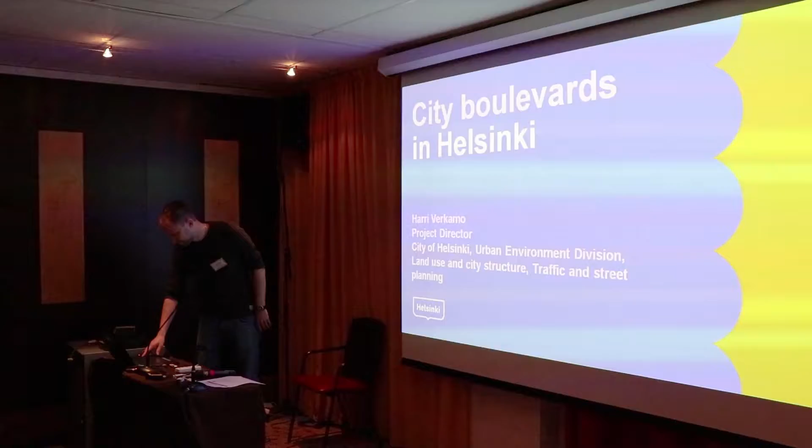The main basis of the city boulevards is the new city plan for 2050, made a couple of years ago, which is the new general land use plan in Helsinki. The plan allows the city to grow with a very high volume of inhabitants, from the current 625,000 to up to 860,000 inhabitants by the year 2050.

A third of the growth is planned to come from the gradual transformation of motorway-like entry routes, so-called city boulevards. Four of these proposed boulevards have been stated illegal at this point by the court, but the city has complained about this, and the legal process is ongoing right now, which of course affects the planning of the boulevards.

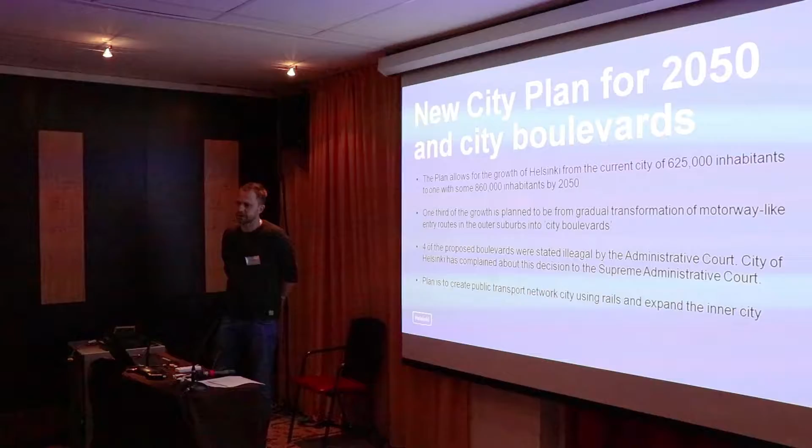The main plan of the new general plan is to create a big public transportation system which relies on light rail and heavy rail connections.

Public transport is the one thing that has been very important to the city of Helsinki, and we have made lots of work to improve it. Just last year we opened the metro expansion, the first stage of it, and the second stage of the expansion is under construction and will be open maybe in 5 or 6 years.

Also in the region there has been built a train loop to the airport, and there's another train loop under planning that goes under the inner city.

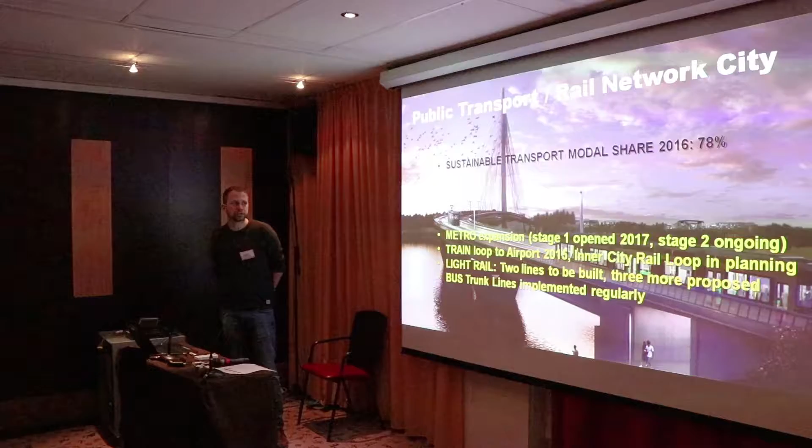Light rail is one big part of the new city plan, and we have one line that is going to be built very soon. In a couple of years the building will start, and it's one east to west connection in the city. We've also made lots of work with the bus trunk lines, so faster bus connections in the city. The sustainable transport modal share is now 78%, which is quite high, I would say, in the city.

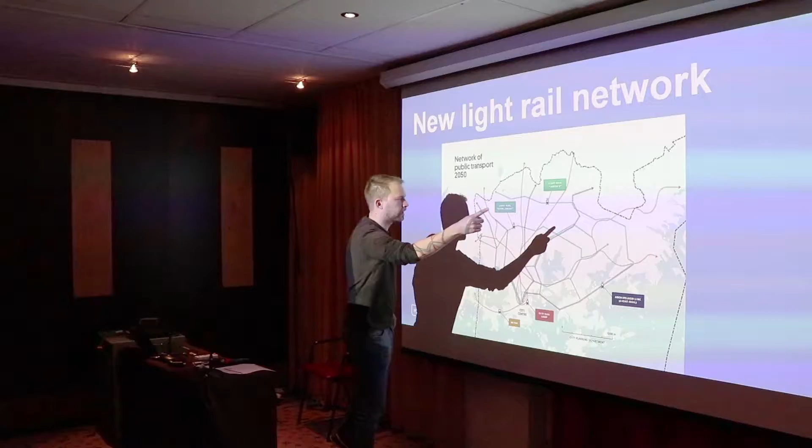But the one we are missing now is the light rail system, and this is the next stage to be built. The first light rail line is going to be this so-called Jokeri line that goes from the east part of the city to the west and to Espoo, and will continue in the Espoo side also. So it will be a good changing connection also to these entry railway connections.

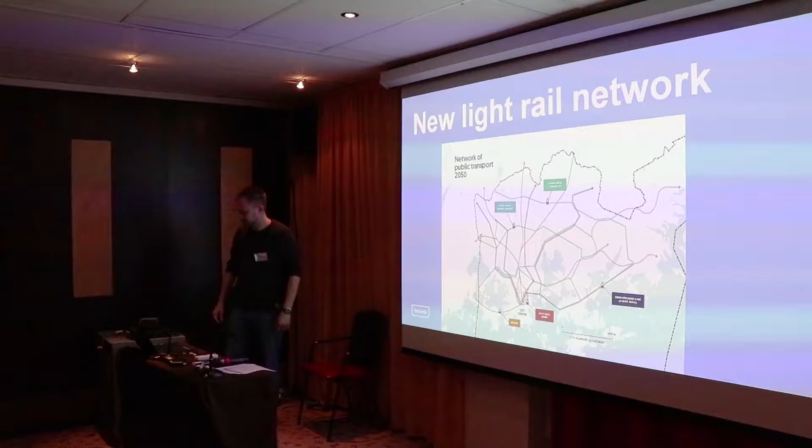But this is very important if we are planning to build some city boulevards, that we improve this light rail network at the same time.

That's why we need the city boulevards to grow the inner city outside. These areas used to be some harbor areas, but in the early 2000s the harbor moved to the east part of Helsinki. So these became vacant for another use, and are now being built as mostly apartments and some businesses also.

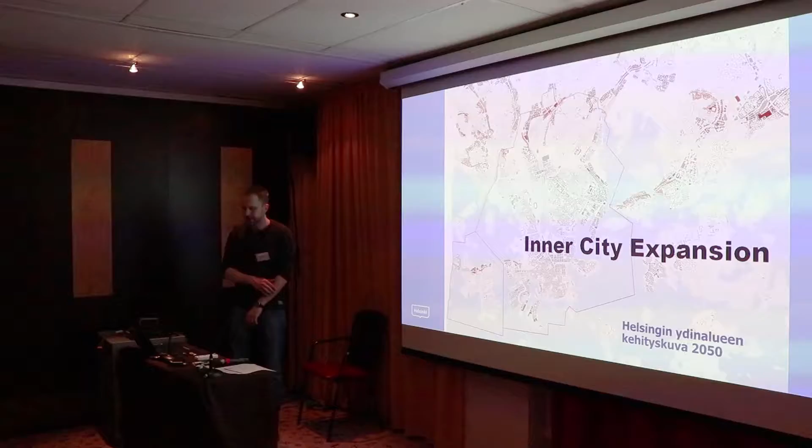Pasila area, which I'm working in, is right here. Here's shown the new inner city expansion areas that will be the next stage of the inner city, to build more inner city, and these are all based on the city boulevards, these areas. So to expand the heavily built inner city is the main focus.

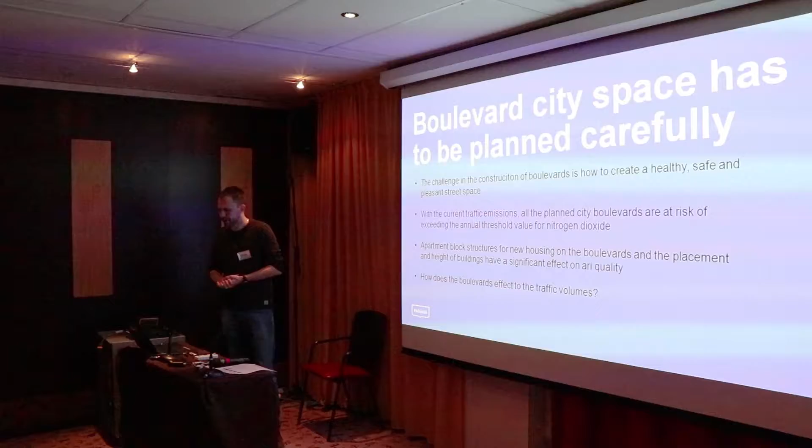But planning the boulevards, there are some very great challenges also, which has to be concerned. One is how to create a healthy, safe and pleasant street space, because all the boulevards will be in high traffic volume streets. So these are very difficult things that will create lots of challenge in the planning.

And what are we going to do with the emissions? With the current emissions, they will be exceeding the annual threshold of, for example, for nitrogen dioxide. So something has to be done. You have to lower the volumes or change how the cars operate.

Also, planning the apartment blocks has a great effect on how it will be in the boulevards. There are some studies on how to construct buildings so the air will flow on the streets, and it will change - it will be better quality air.

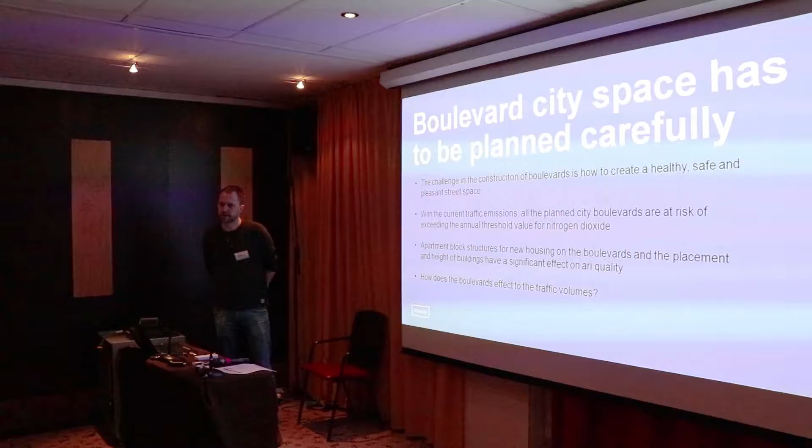One big question is how does it affect the traffic volumes, and what happens to the car traffic? So how will it proceed? We need to make lots of studies about the effects of the traffic, the traffic volumes and directions. We thought that if the traffic can't go with the boulevards as it goes now on the highway, where will it go? Will people change their behavior and use another transport, or will they use another road or smaller streets? This is something we don't want - that the traffic flows into the smaller street network. That's a great concern.

What will happen to emissions and traffic noise if we start to build lots of apartments next to the heavy traffic streets? How will the apartments be, and how will the street environment be with the great traffic and the emissions?

And how will it affect safety, especially pedestrian safety? Because now with the highways there are no pedestrians there, and if we transform them to streets, we will create some conflict points with car traffic and pedestrians. How will we plan those conflict points so they will be safe for the pedestrians?

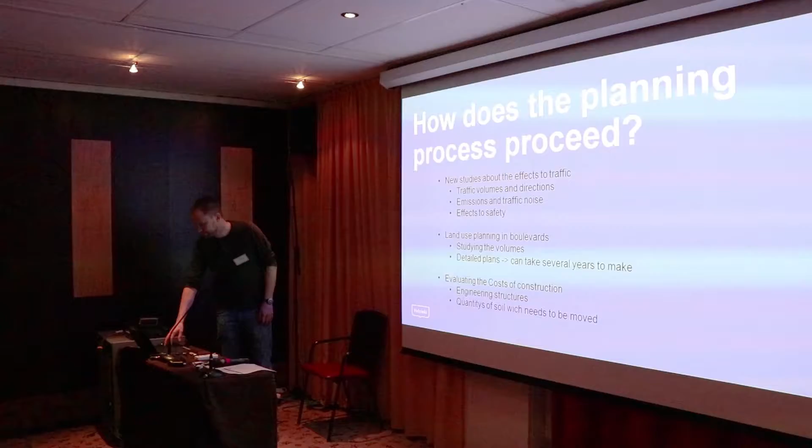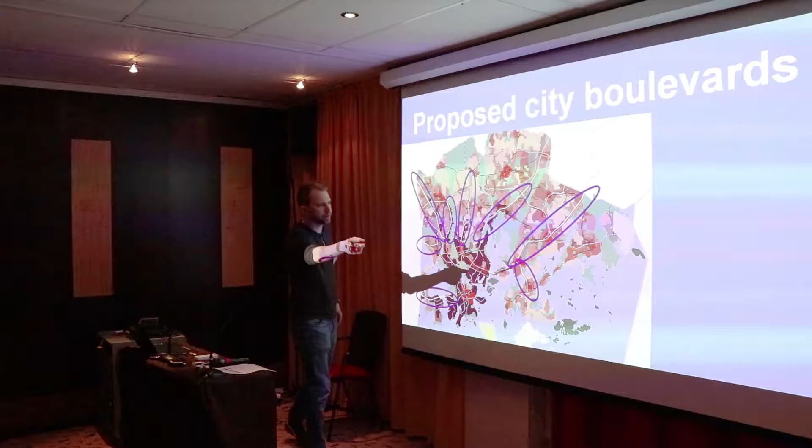So these are the proposed boulevards in the general plan. It's all the entry roads to the inner city, inside this ring road that goes around the city. So it's a very big plan, and it includes all the highways in the city.

The first city boulevards will be these three, because these are not stated illegal at the point, so it's easy to start with them. The first one is Vihdintie highway, or partly street on the south side of the highway, located northwest of the inner city. This is maybe the easiest highway to transform to a boulevard, because it already has one-level intersections with traffic lights, and it has lower volumes of car traffic, about 30,000 vehicles per day. So it's kind of already a city boulevard - it only needs the buildings on the side.

The second one is Tuusulanväylä highway, which you use if you go from the inner city to the airport. This is a highway with only multi-level intersections and traffic volumes up to 60,000 vehicles per day on a weekday. So it's much more difficult to plan, traffic-wise at least.

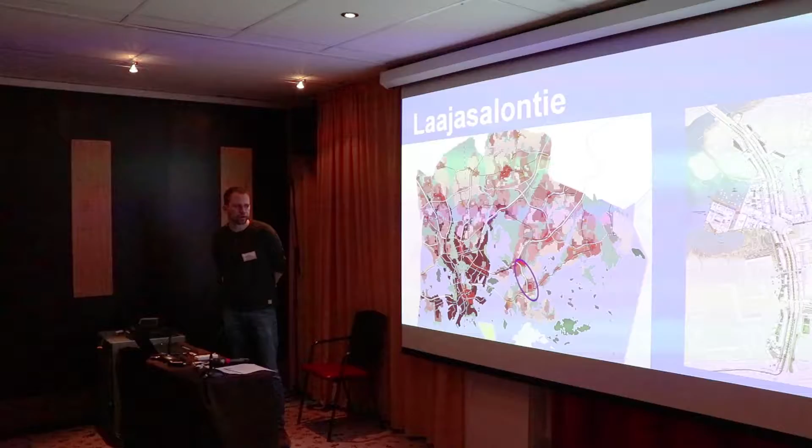And the third one is Laajasalontie street, which is an old street connecting the old oil harbor to the highway network. It's a city-owned street, and this is the one that Pirjo will present in a little bit more detail about this project.

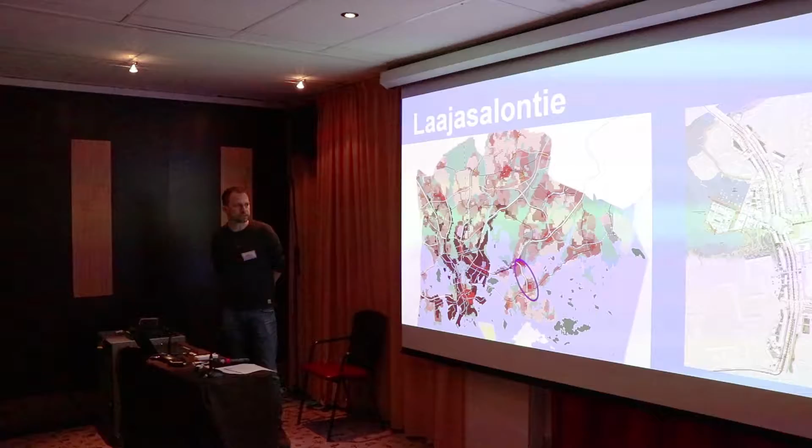And then there are the, at this point, illegal boulevards - these are all state-owned highways. At the beginning of this year, the administrative court ruled that these are against the Uusimaa regional plan. But as I said, the city of Helsinki has appealed against this verdict, and it's an ongoing legal process. We have to wait for the Supreme Court decision about this, and it will affect the planning time of these highways.

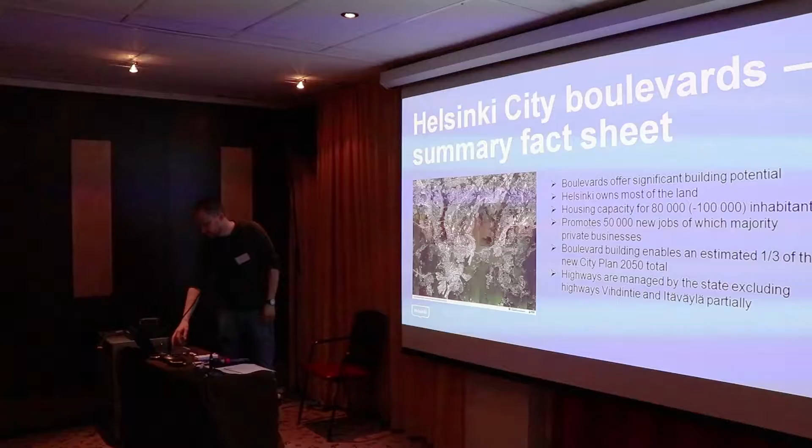Here's a little summary for the boulevards. According to the general land use plan, they have significant building potential - it's one third of all the building potential in the plan. So they're a very significant part of the city plan.

The city of Helsinki owns most of the land around the boulevards - not the exact highways, but the surrounding areas. Housing capacity is up to 100,000 inhabitants according to the plans, and also 50,000 new jobs could be created in the new boulevards.

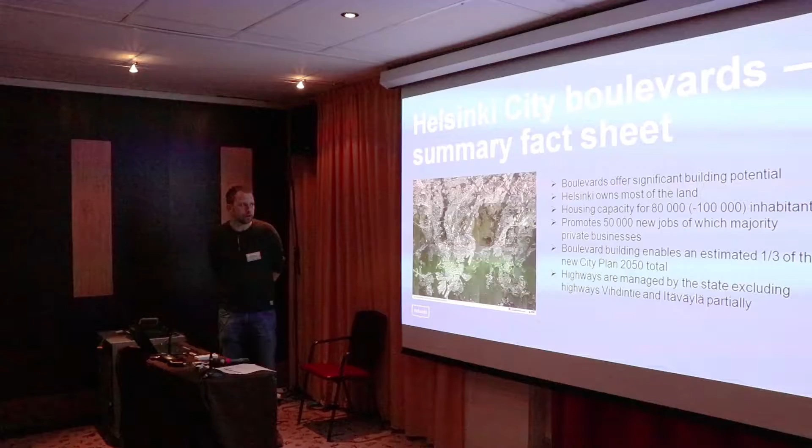Most of the planned boulevards are now highways which are state-owned, excluding the Vihdintie highway on the northwest, which from the south part is a city street, and also Itäväylä highway that goes from the east side of the city is mostly a street, and Laajasalontie is a street also.

And now I think it's Pirjo's turn to present the Laajasalontie street. Thank you, Kirsi, for the background - also from another point of view.

My name is Pirjo Siren, and I work as a project director in Helsinki City Hall, executive office. I'm in charge of two of these major urban development projects in inner city Helsinki. Today I will tell you some background of the projects, then we will have some glimpses of the urban development part, and after that a closer look at one of these first boulevardizations.

Can you hear my voice down there? Okay, good, so I don't have to try to voice control. Let's see if we get it further.

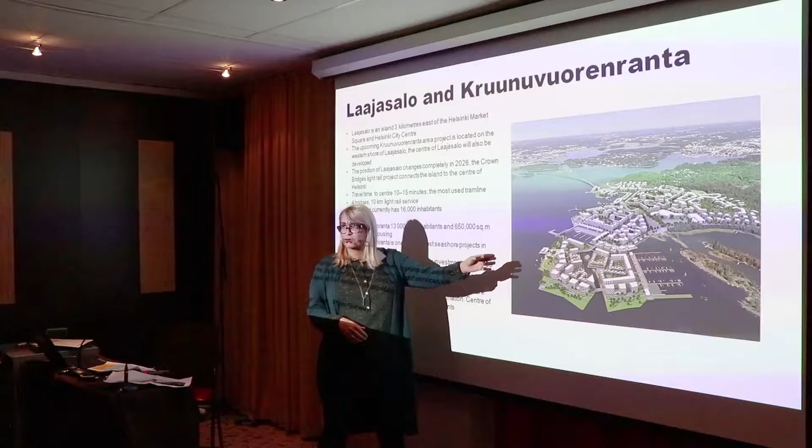Harri was mentioning that the inner city has three larger urban development projects since the oil harbors and other harbors moved to another location. On the picture, on the left side, there is the Helsinki city centrum. You can't see it, but this is Kruunuvuorenranta, located 3 kilometers from the city centrum. Next to it, a few kilometers away, is the centrum of Laajasalo Island.

The position of the island will change very dramatically in 2026. That is why the city has decided we will build quite heavily to these new areas. Kruunuvuorenranta will have about 13,000 new inhabitants and 650,000 square meters of floor area in the next 15 years. It's under construction now, and there are already 2,000 new inhabitants in the area.

The other urban development area, Laajasalo Centrum, is half the size, so there will be about 6,000 new inhabitants and about 300,000 square meters of floor area in that area. In total, the island currently has about 18,000 inhabitants, and in the future it will be a city next to the city centrum of Helsinki. So it's quite a large area.

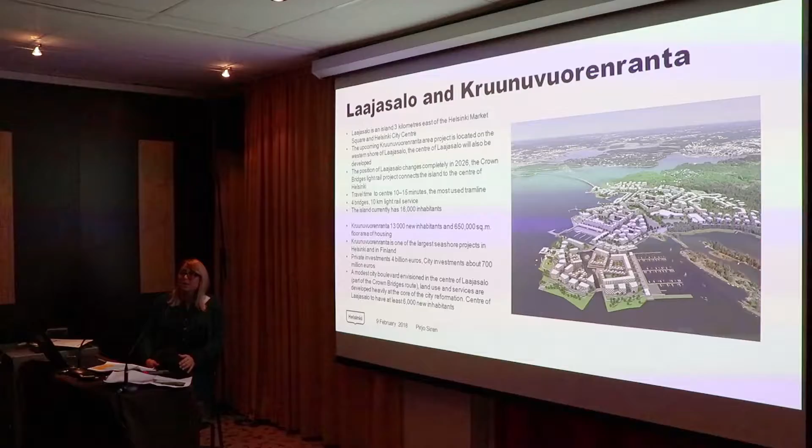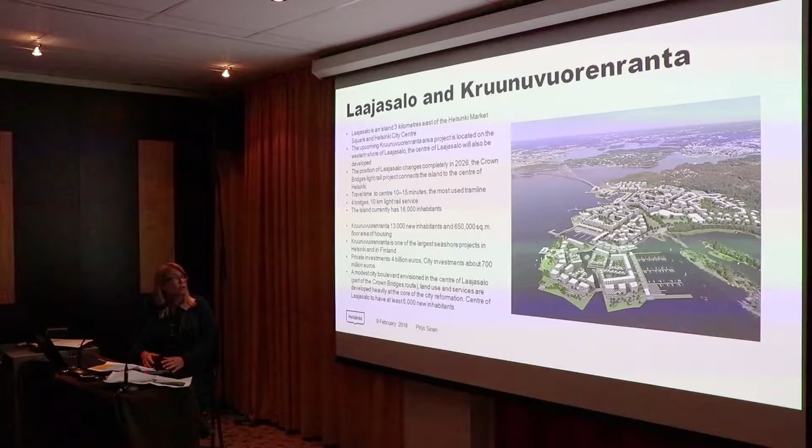When you think about the areas from an economical point of view, in Kruunuvuorenranta the private investments will be about 4 billion euros, and in Laajasalo Centrum about 2 billion euros. The city will invest about 700 million euros to these areas. So this is the background of these area projects.

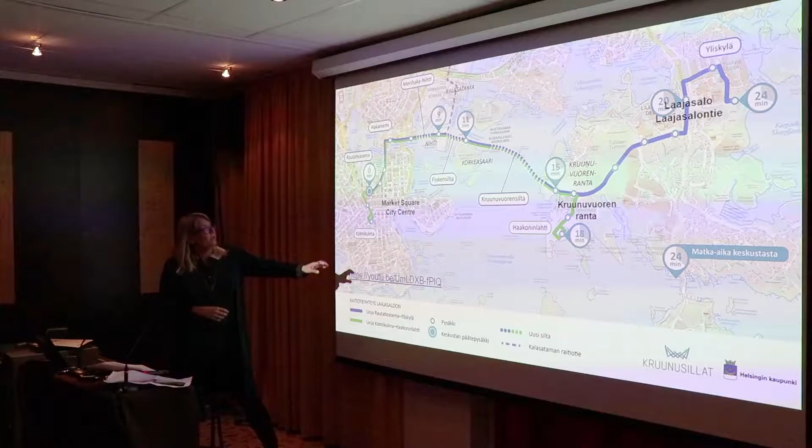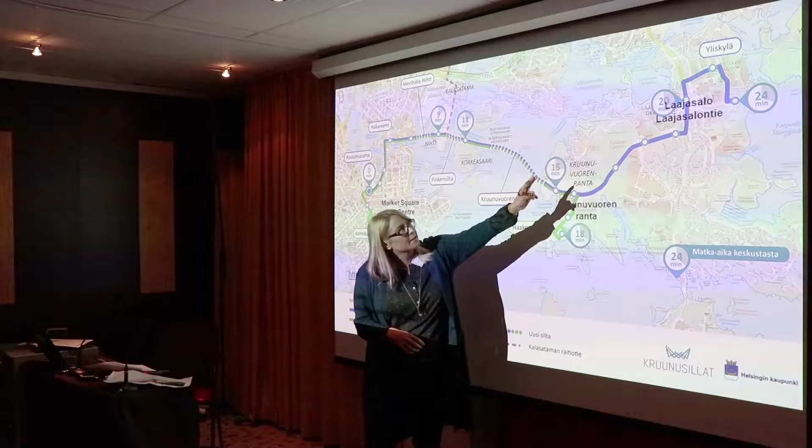I was mentioning earlier that the position of the island will change completely. Here is the city centrum, city hall and market square. Kruunuvuorenranta was over there on the earlier picture, and Laajasalo Centrum and the Laajasalontie street boulevardization are over there.

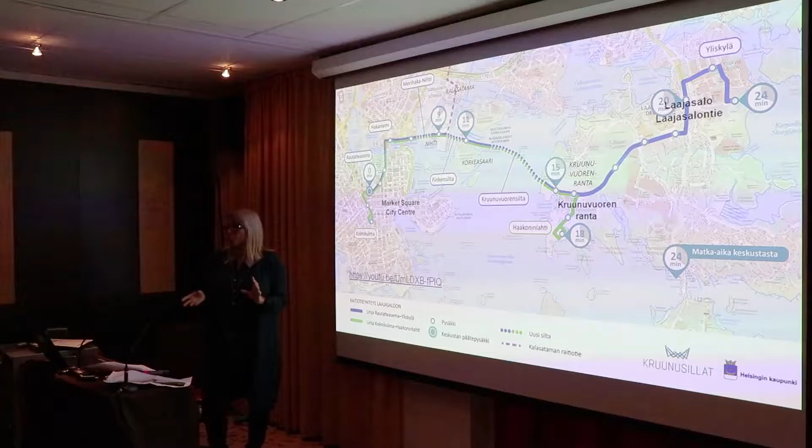The leitmotif connecting all these areas together is the Crown Bridges speed tramway project. You might have heard some words of it before, and you probably have seen at least the picture of the Finnish largest and biggest bridge. I think some of you were in Helsinki a few years ago.

We will start the building in 2020, finishing by 2026. It is very difficult to move from Laajasalo to the city centrum - nowadays it takes about 35 minutes via bus.

In the future you can get in 15 minutes to Hakaniemi and to the centrum area. The city committee made a decision 2 years ago that we have to construct and we will build this speed tramway connection. The total value of the project is about 270 million euros.

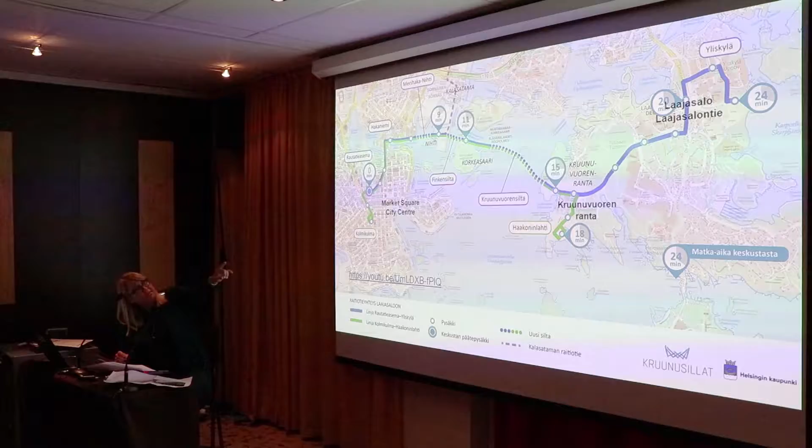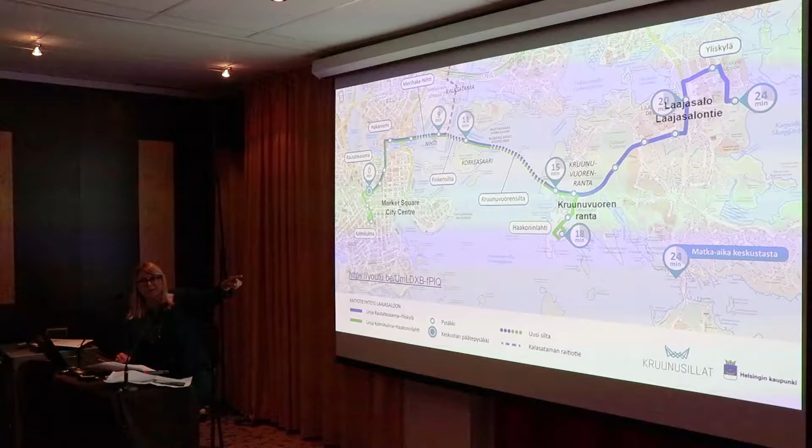It will have 2 lines. The blue line will be the main line with 45-meter speed tramways. The green line will be a shorter line from the center to Kruunuvuorenranta with new street speed trams as well, but they will be about 35 meters long.

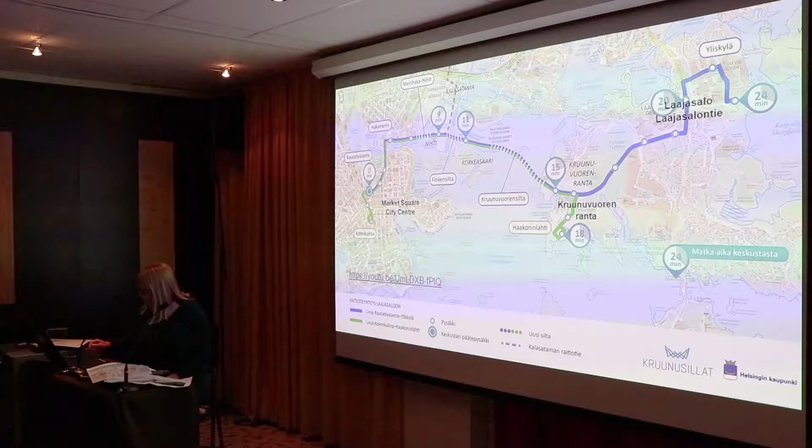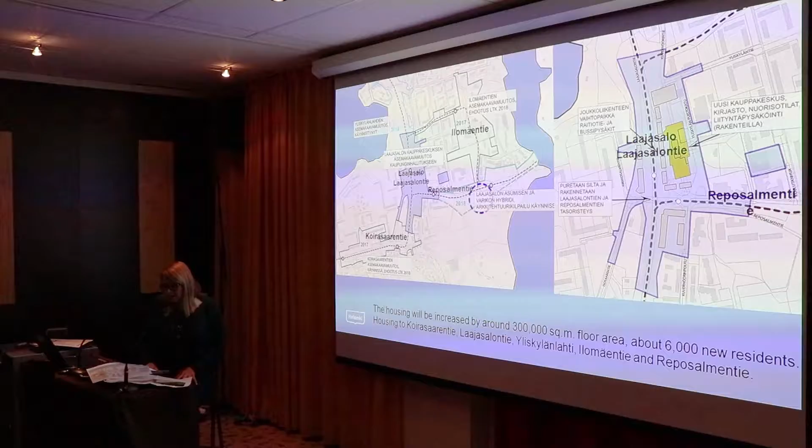So this is kind of a background for the change to the island and also a background for why we will have a boulevardization on the main road in the area. Now let's have some glimpses of the urban development part. There are 5 land use plans ongoing right now.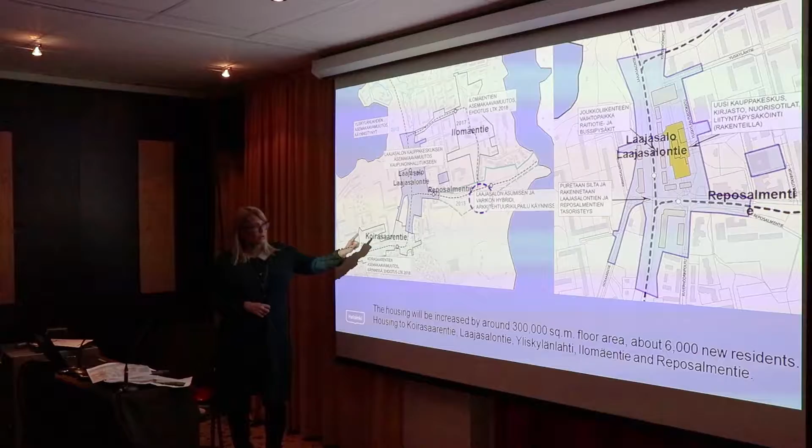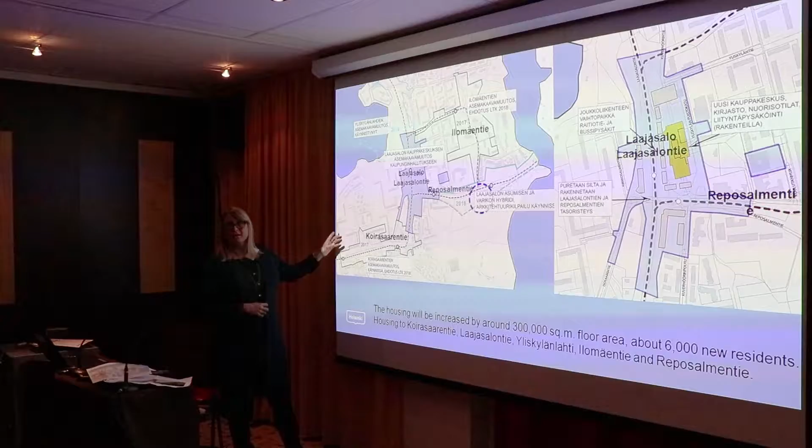The Laajasalontie boulevardization is in the middle over there. But also another main road, Koirasaarentie, is over here. It connects the centrum to Kruunuvuorenranta and to the Helsinki centrum. A lot of new floor area will be added over here too.

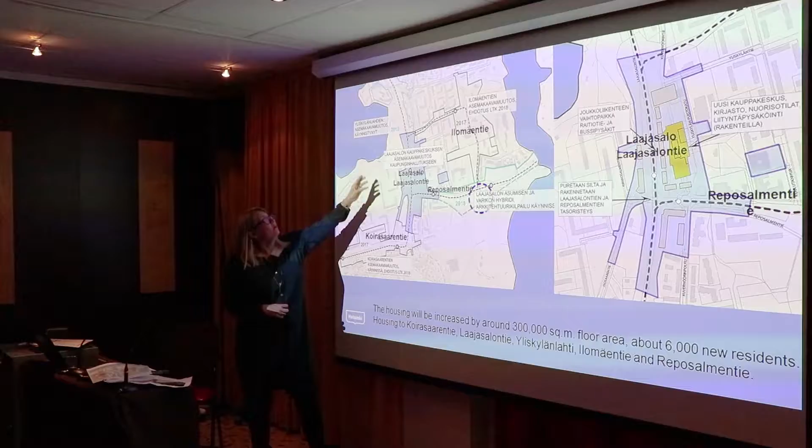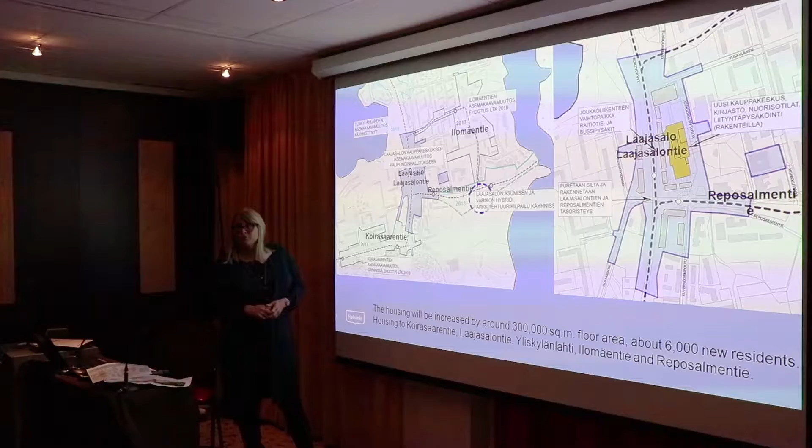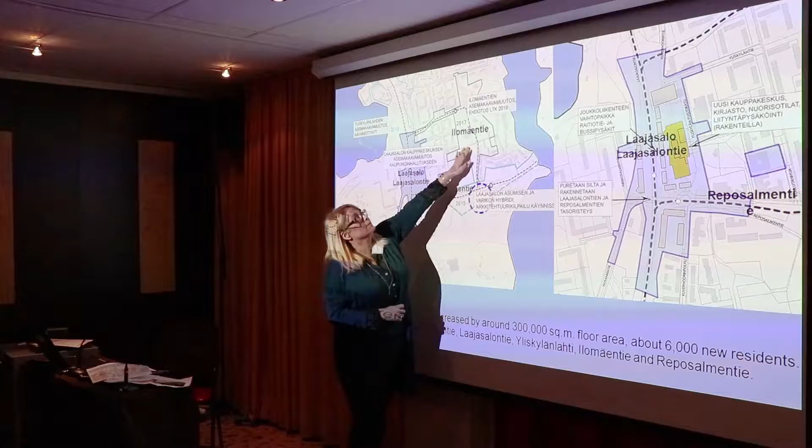Another large area, the turquoise area over there, is Yliskylänlahti, which also has a lot of floor area for housing coming next to the boulevardization. The 4th area is Ilomäentie Street, and the 5th is Reposalmentie Street.

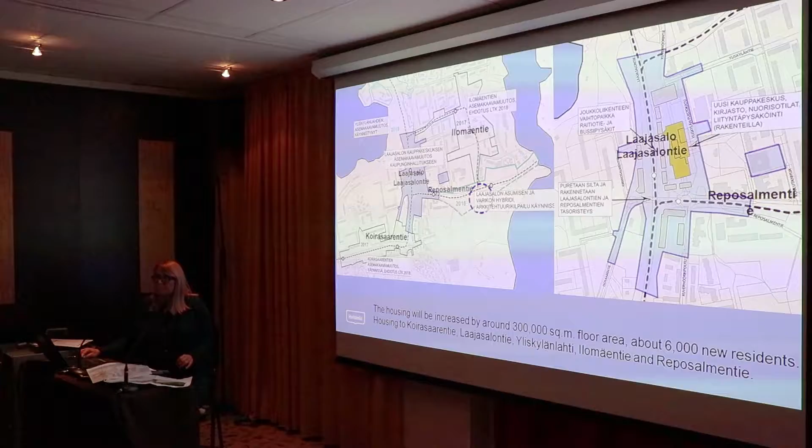In total, as I was mentioning earlier, the housing will be increased by around 300,000 square meters, and it means about 6,000 or 7,000 new inhabitants in the centrum next to the boulevardization. Some glimpses of those areas you saw.

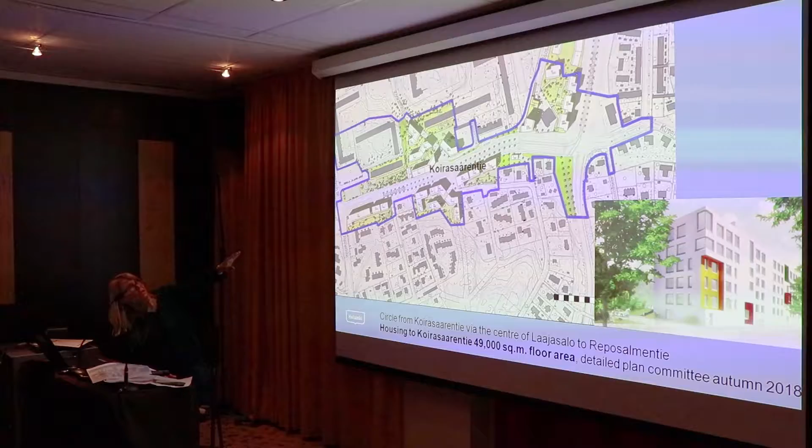This is the Koirasaarentie main road, just before the boulevardization, the southern part of it. In the yellow, you can see the new block of flats. And in the grey, you can see the old structure over there.

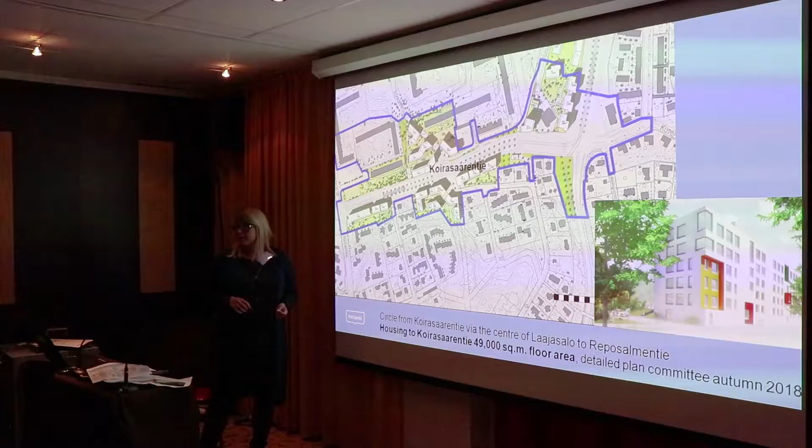The street will have new faces too. In the center, there will be a speed tramway line. Of course, there will be 2 car lanes in the future, but the traffic arrangements will change considerably over there.

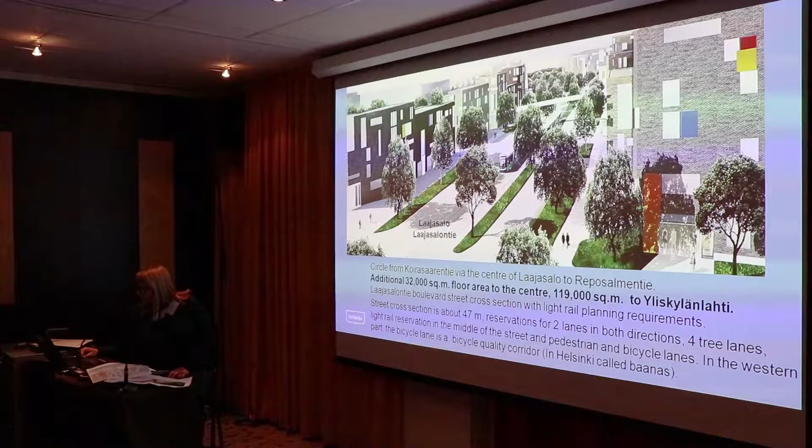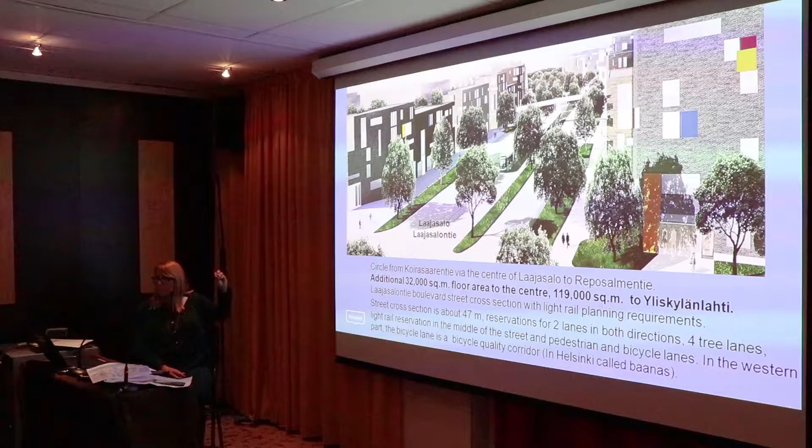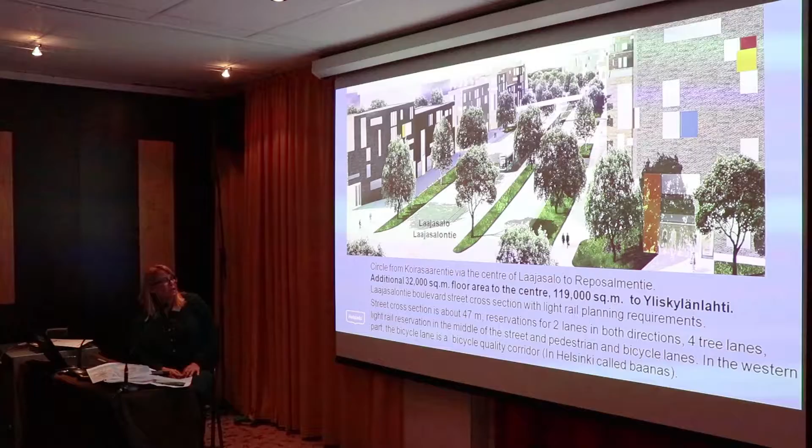And now we come to the Laajasalontie boulevardization. As Harri was mentioning earlier, it will start from the south part from Koirasaarentie and go all the way north through the Laajasalo island. There is a street cross section over there.

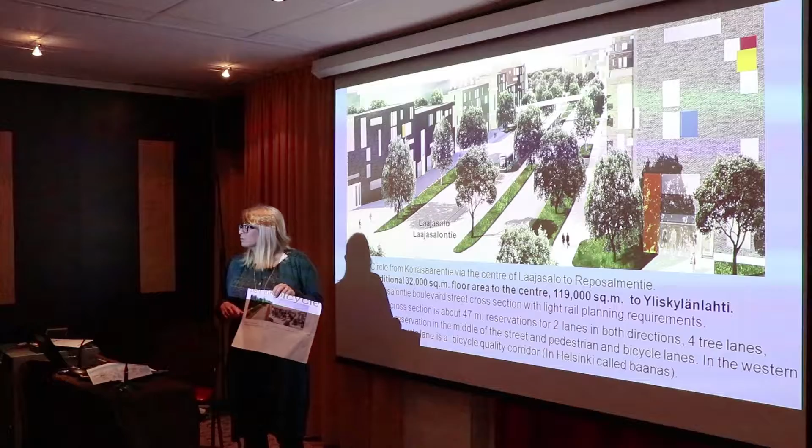You can have a look. I can give you a picture and you can have a look at it too. You can see here the old road-like situation without any housing projects. Maybe Elin can put it over.

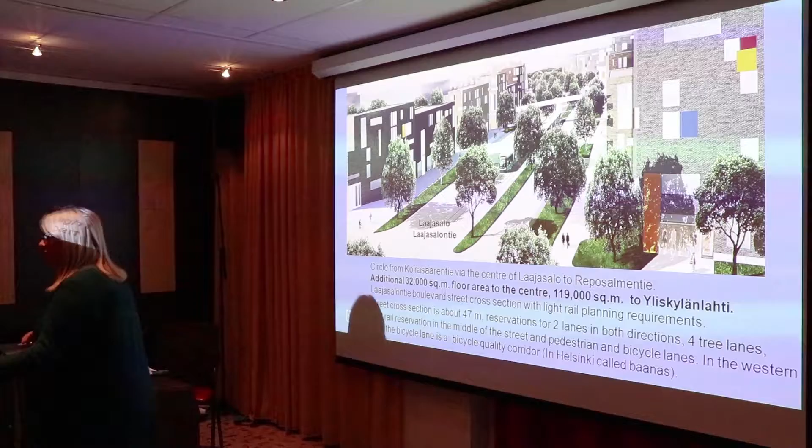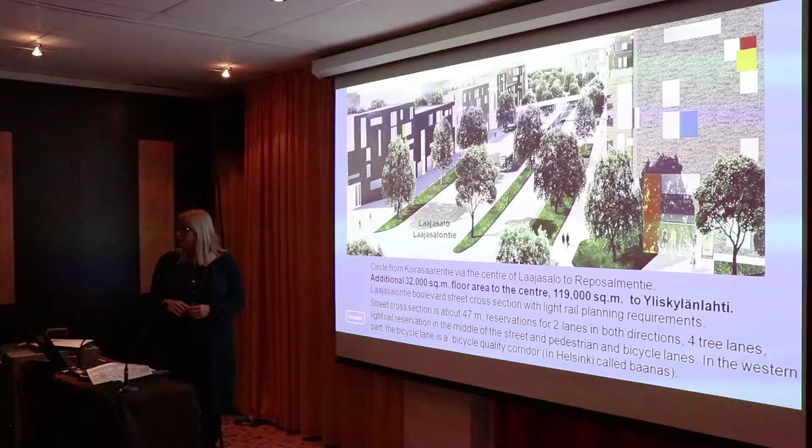There was a 60s Smith and Polvinen plan about the motorways of Helsinki, and the current situation, which you can see in the picture, is due to that old plan and one realization of it.

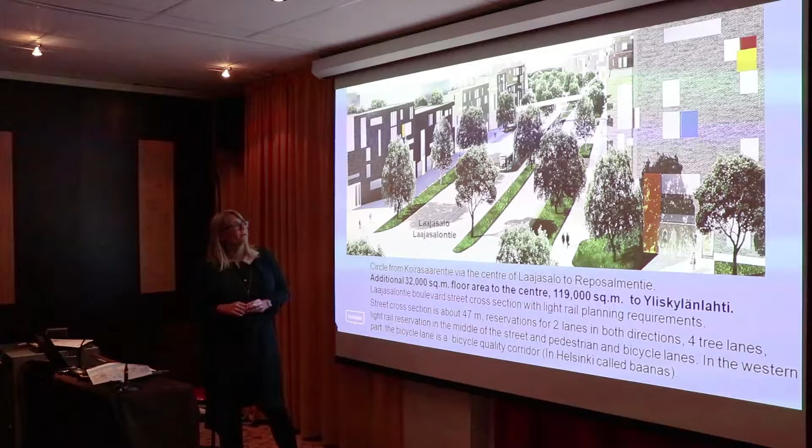The street cross-section in the boulevardization will be about 47 meters, and we will have 2 car lanes, just as today, to both sides, going north and going south to Kruunuvuorenranta and Centrum. There will be a new light rail reservation in the center over there, 4 boulevard lanes for trees, and new arrangements for bicycles and for walking.

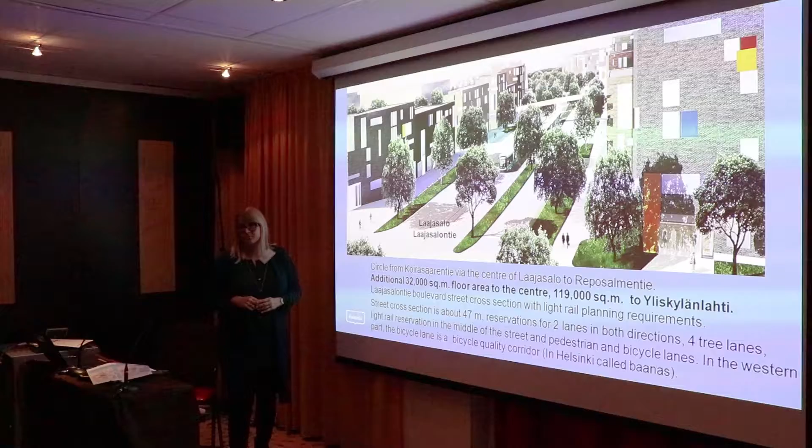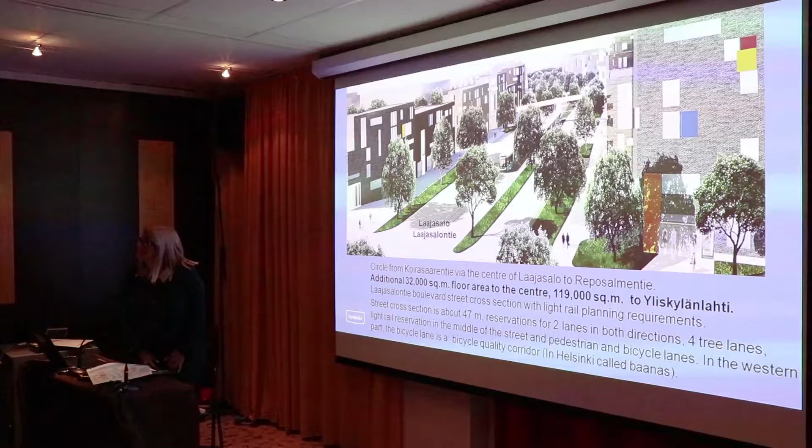Nowadays, as you can see in the picture, it's not a very good situation. The bicycle lane on the western side will be a quality corridor type of line. We call them in Helsinki 'baanas'.

Next to the boulevardization, there is an ongoing construction site already. There's a glimpse for you about the shopping center. Behind it, in the future, there will be the housing projects and the boulevardization.

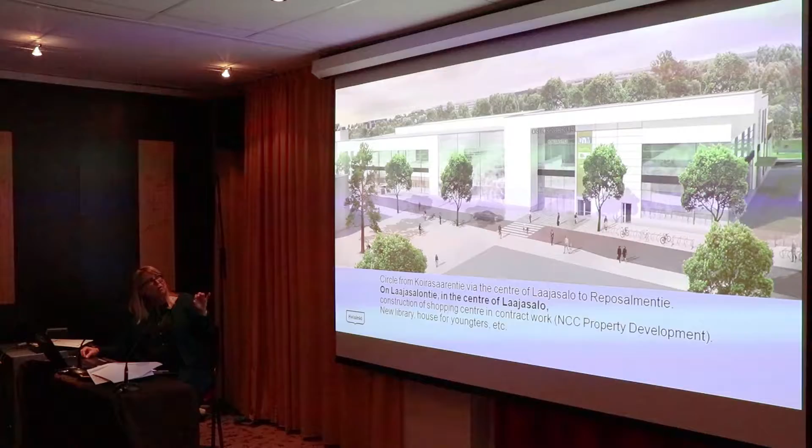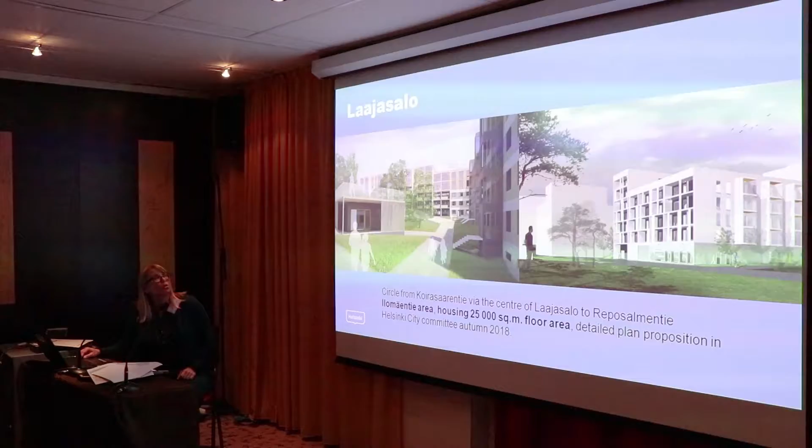It's a new hybrid kind of building. It has a new library, a house for youngsters, and other services as well. The last glimpse of the housing projects before the boulevardization is over there. In the Ilomaentie area, there will be more traditional blocks of flats coming after the construction of the street area.

So now we can have a bit more thorough look at the boulevardization.

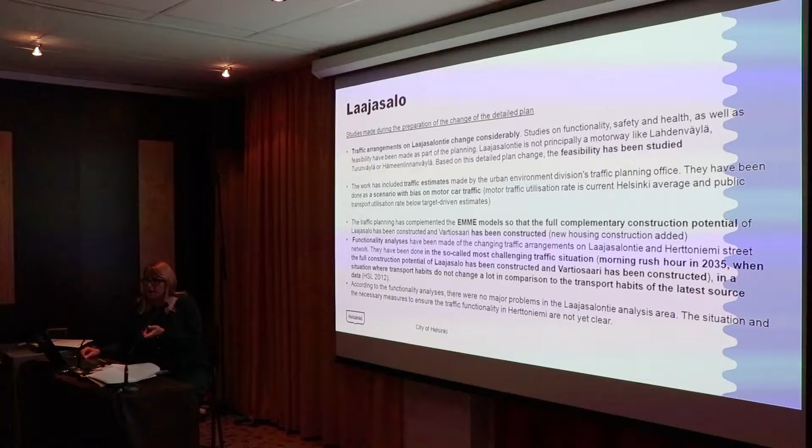Harri was mentioning the problems in general, what we will have planning the boulevardizations. In Laajasalontie the situation is really that it's not a motorway, and the state has absolutely nothing to do with it. The city owns it and the city is upkeeping it. So it's a bit different situation than the other boulevardizations.

We started the work so that we updated traffic estimates in the traffic planning office where Harri works. The basis of the work was that there was a scenario with bias on motor car traffic.

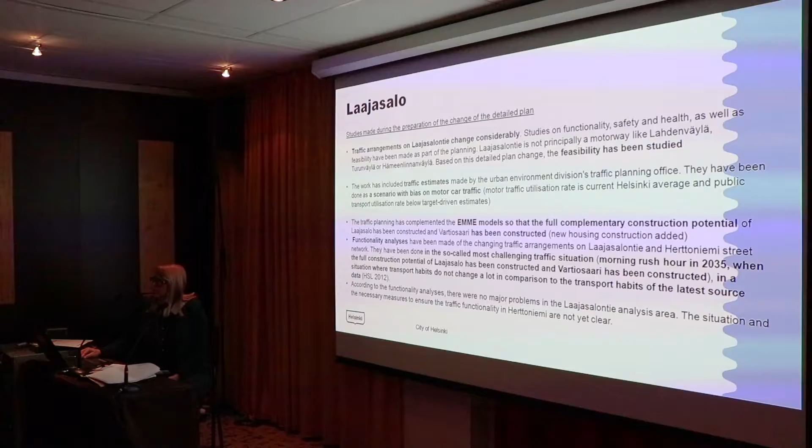Then we used EMME models, and the basis of modeling was that the whole Laajasalo has been constructed, all the housing has been done. Then we made functionality analysis, street crossing per street crossing, for the situation in year 2035 in morning rush hour, the so-called worst scenario.

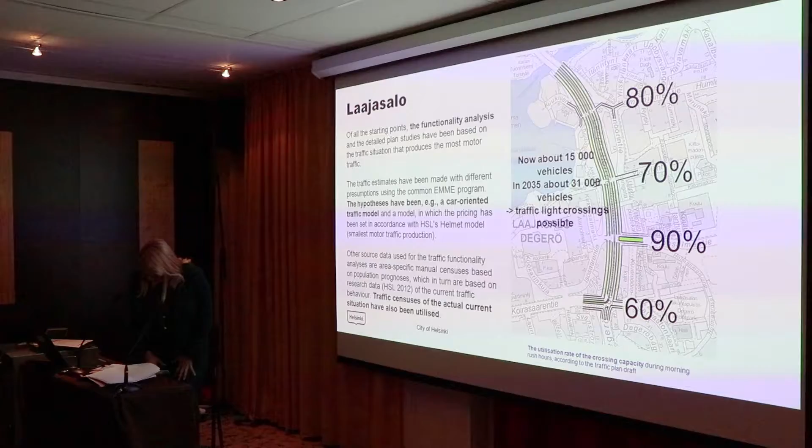It seems that in the most challenging rush hours there will be queuing, because all the cross-sections are not interchanges anymore, not in multiple levels anymore - they will be traffic light interchanges. That's why there will be some queuing, but it's not so bad, maybe two light cycles, not more. So during this modeling we learned that there will be no major problems in this boulevardization. The different thing will be at the motorways.

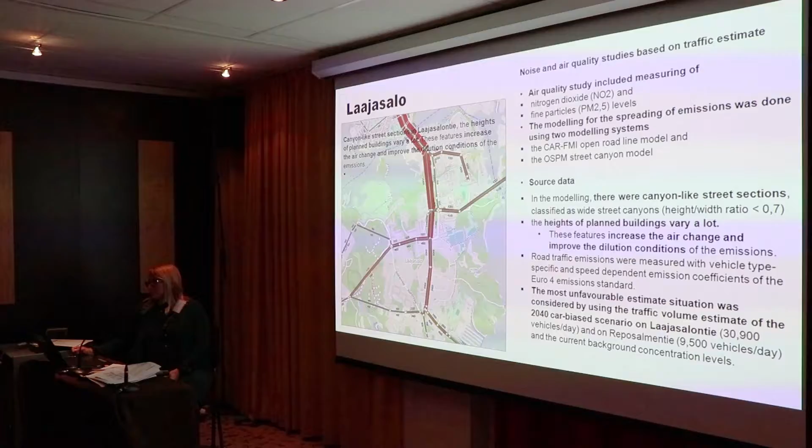Then there has been a lot of discussion in Helsinki about the noise and air quality studies. We took a closer look at the air quality by modeling it, and we used two modeling systems, which you can see on the right side: open road line model and street canyon model.

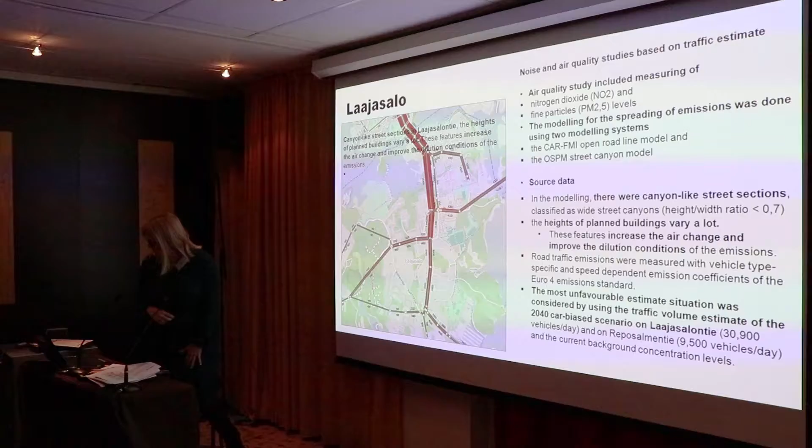What we learned is that it's a good thing in boulevardizations if the heights of the planned buildings vary. It improves the dilution conditions in the streets, so that is a good thing.

Conclusions were that the concentrations of nitrogen dioxide were under the yearly limit on all height levels. There was one checkpoint where the daily reference value was close to the reference value. When you have a look at the fine particles, it seems that the yearly average concentrations were clearly below the yearly limit.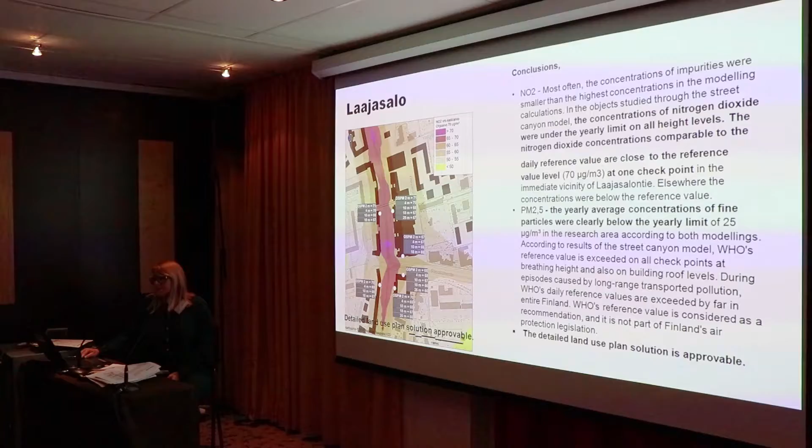And in total, in Laajasalontie boulevardization, it seems that the land use plan is approvable from this point of view.

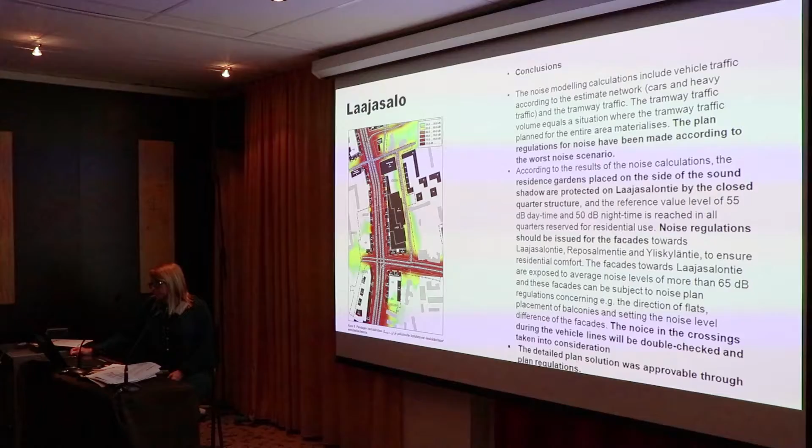Then, of course, there is the question of noise, as Harri was mentioning earlier. The city also made noise modelings, and I think there were no surprises in it - it's basic land use planning which was shown.

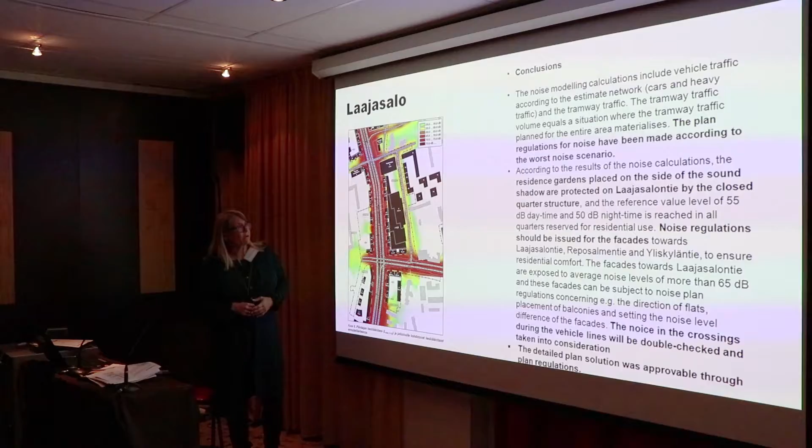The residence gardens - the black ones are the new housing plots, and this is the hybrid shopping center over there. You have inner gardens here, protected from the noise because they are on the other side from the noise. But it seems that noise regulations should be issued for the facades next to the boulevardization.

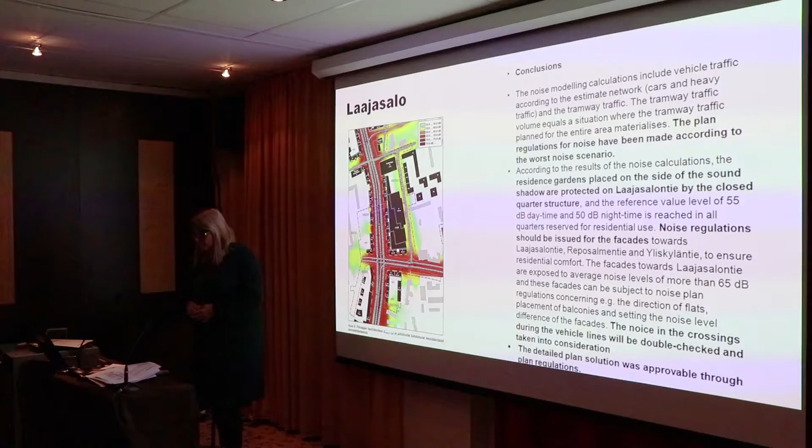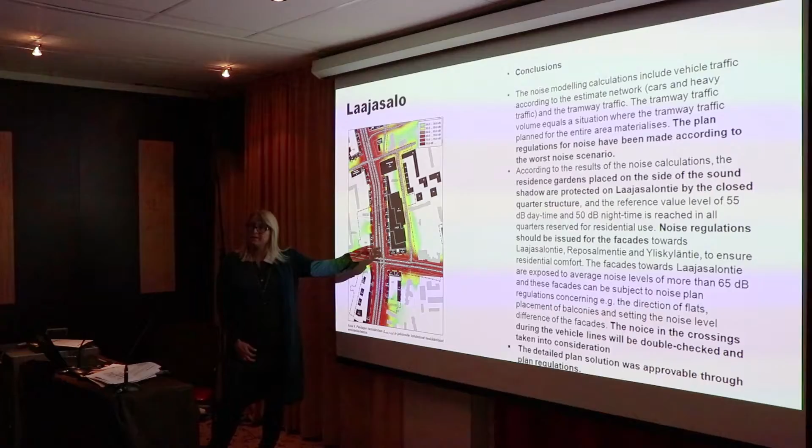We learned in one study that if you have a cross-section with traffic lights and there will be queuing, it might affect the noise too. So we decided to double check these areas and we can take it into consideration later.

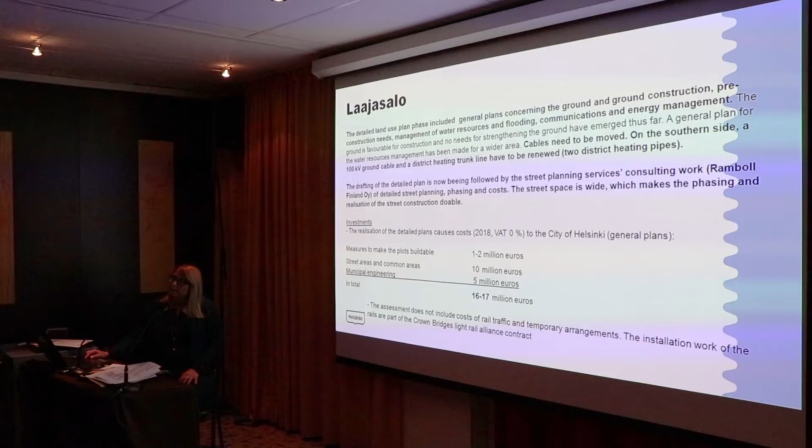Of course, when the city is planning an urban development project of this magnitude, there is a lot of general planning going on otherwise too. We had a look at ground planning, pre-construction needs of the plots, water resources, flooding conditions, communication, energy management, etc. We had a look at it in the larger area.

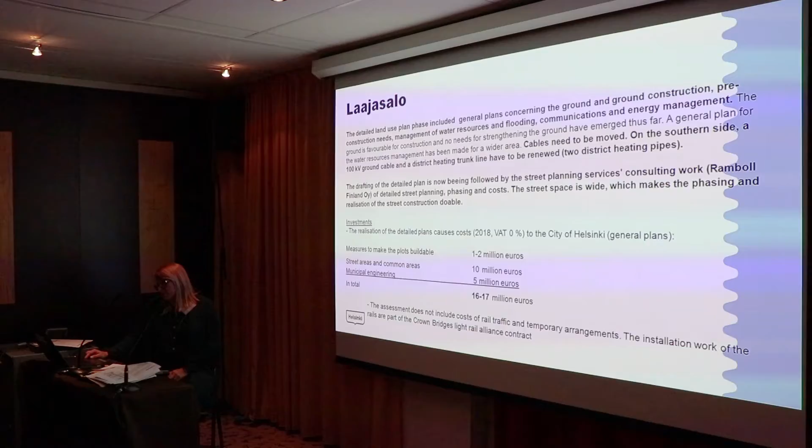It seems that some cables need to be renewed and changed, even a bigger ground cable and district heating trunk line. Also a 3 million euro water pumping station must be relocated. But otherwise there were not so many surprises or shocks.

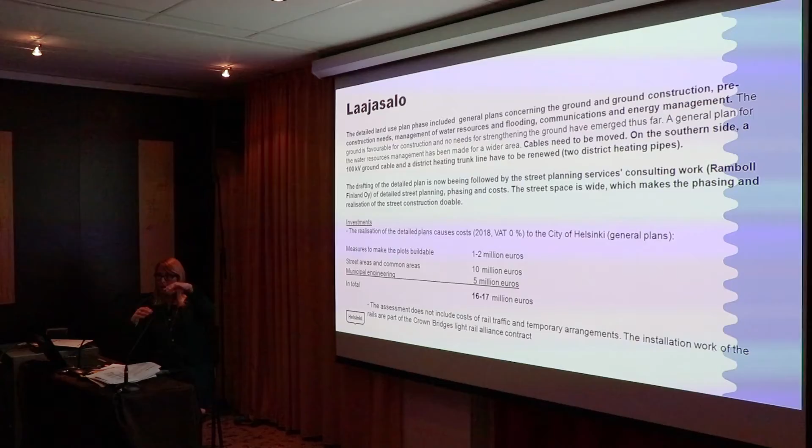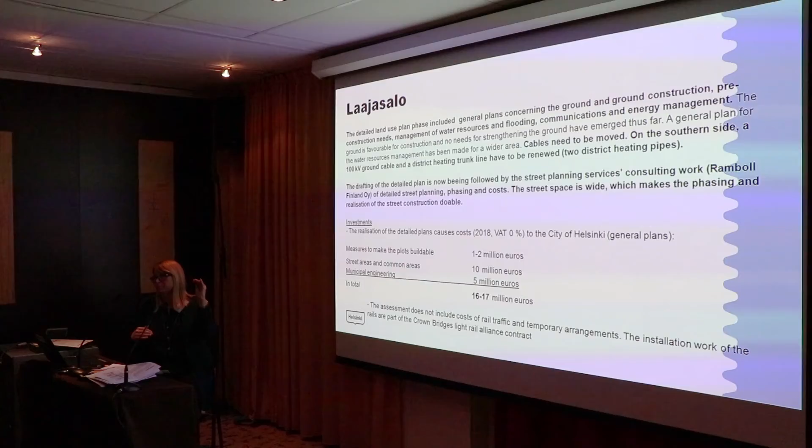We are doing right now a more thorough street planning. We are planning phasing of the construction and taking a closer look at the investment costs. At a general level, the investment cost in that short period I was showing you as an example is about 16 to 17 million euros. The city has estimated that we will get about 27 million euros as income by selling the plots and renting the plots next to the boulevardization. So from the economical point of view, the first part of the boulevardization seems to be okay.